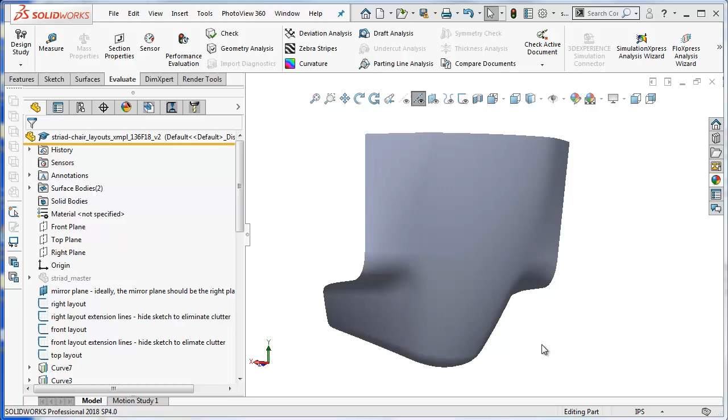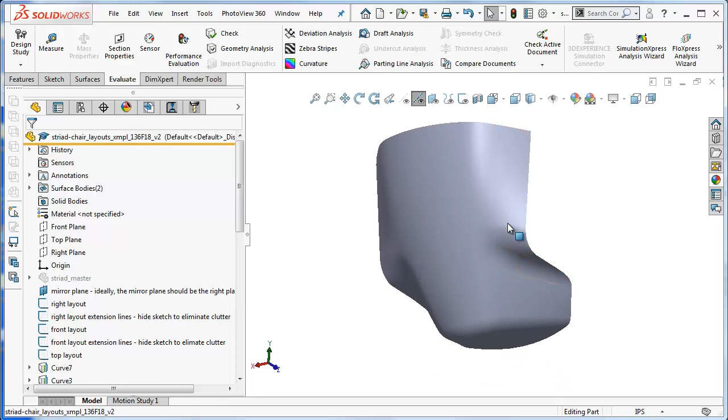Well, this is as far as I've gotten on the Striad chair, which isn't all that bad looking, but I know it's not right either. The key thing here is that there's a big rounded edge that transitions from the back to the sides, and you can see it's somewhat interrupted by the blend for the armrest. I think what's supposed to happen is the armrest is supposed to blend a little bit more forward of this surface, so that this nice rounded fillet will not be interrupted by the armrest blend.

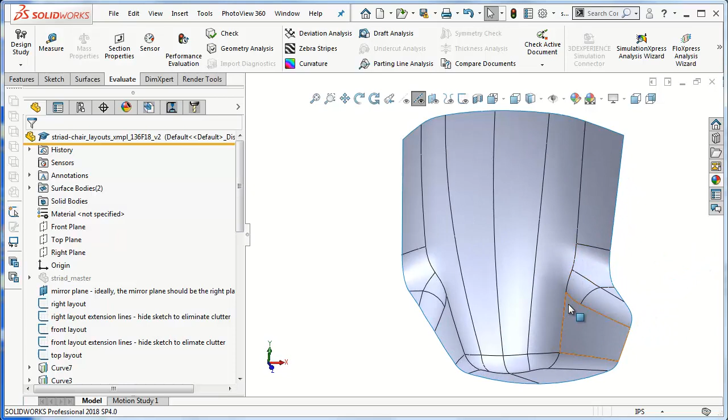So let me just turn on my edges here. You can see how this is sort of interrupting this nice curve here. So if we look at it from the side view, that's not too bad.

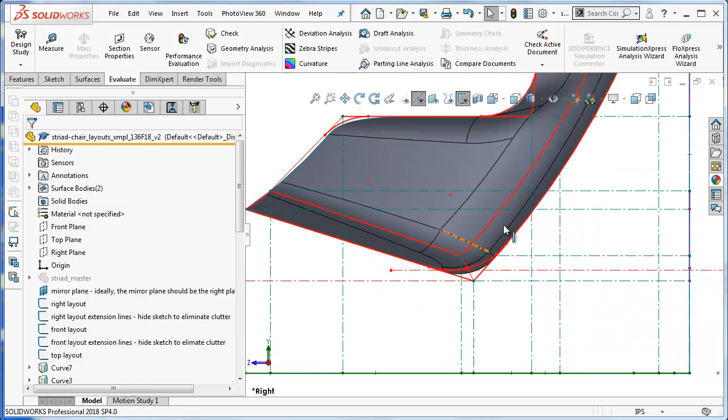But if I turn on my layout sketches, I wasn't able to get as big a fillet in here as it's really supposed to be. This is supposed to be more like 6 inches in here. The rest follows pretty well, and the top view follows pretty well.

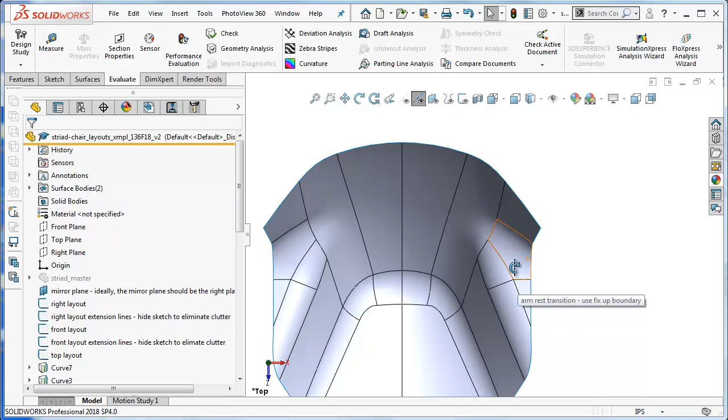So one of the interesting things about the chair is that up at the upper wings here, the seat back is folded forward quite a bit, but when it gets down into the armrest area, it's starting to twist backwards and is not folding forward so much. It's then after this whole blend in the armrest area occurs that this whole surface, of course, is bending forward even more now, because this is the support of the armrest.

So for what it's worth, I'll show you what I've done. This is still pretty much the same as before, but I put a little line on here because I wanted to have a cross-sectional sketch in this area.

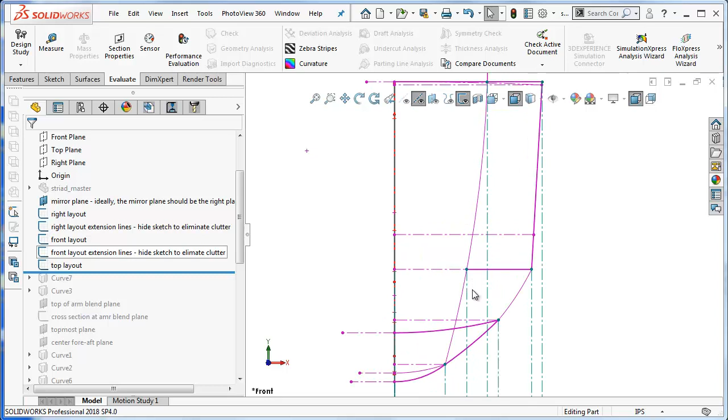My front view has a line that's the center line of that big radius I just showed you, and the armrest is running right into it. I think what's really supposed to happen is the armrest is supposed to stop about here, and there should be a second line coming down. That way the armrest won't blend right into that rounded back surface.

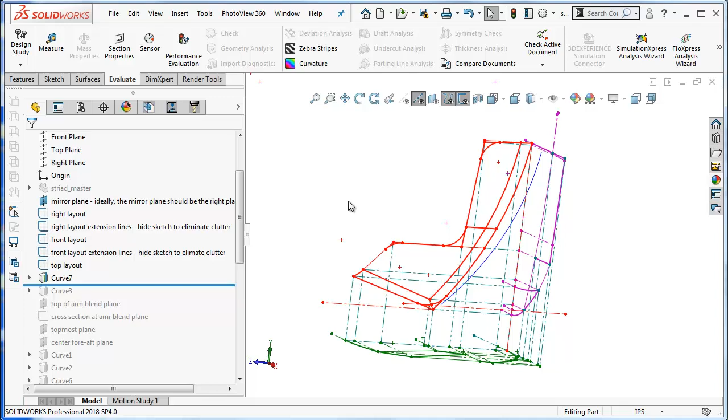So then I made a projected curve here that's a projection of this curve here and this curve here. And I made another projected curve that's a projection of this straight line here and this straight line here. I wanted to have that so I could draw an important cross section. And that's this cross section right here. Let's take a look at that.

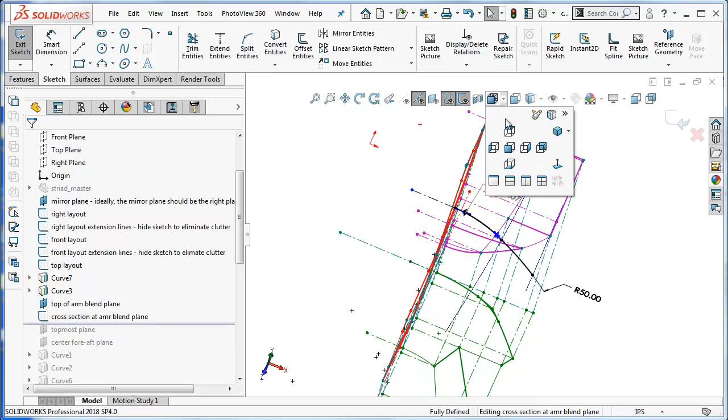This is the seat back area. Then it's blending into what I'll call the wings of the seat back. You can see that this is angling forward less than the top of the wings. In fact, the two are pretty much tangent to each other at this point.

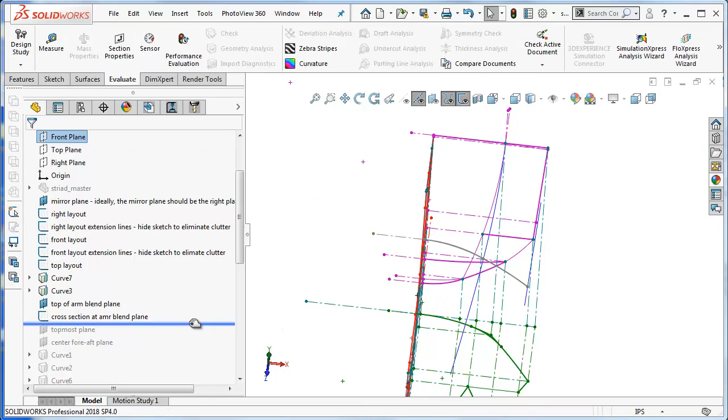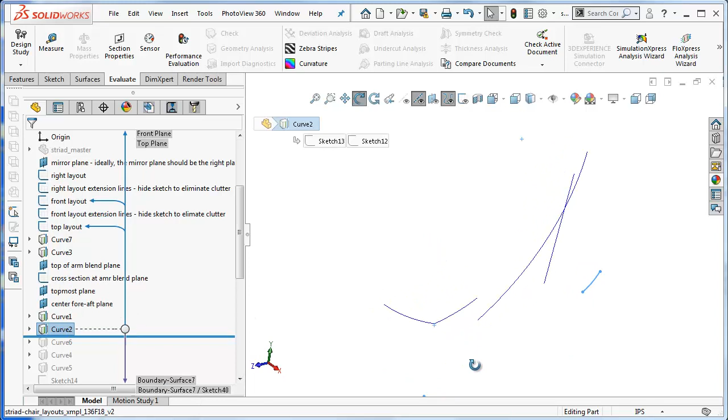So then I just made a bunch of other projected curves, like the one at this front edge here. Let's turn off all these sketches. I'm not sure what this one is for.

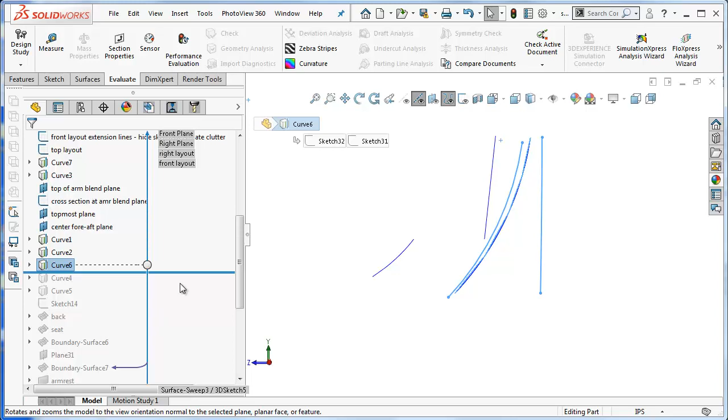Oh, this is the vertical leading edge of the seat area, or you might call that the arm support. And I think this was an extra copy of this projected sketch that I shouldn't have made. Oh well.

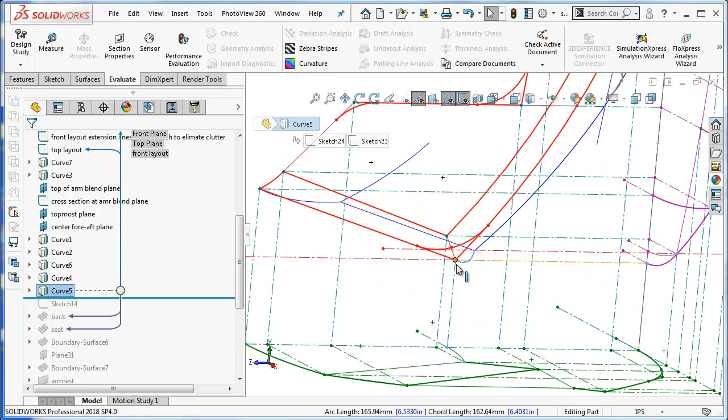This is the bottom edge that transitions from the seat to the arm support. And this curve here is the bottom edge right here, so it's got kind of a curve that's leaning forward. If we look at it from the top, it has to have this curve in it because this represents the shape of the back in this area.

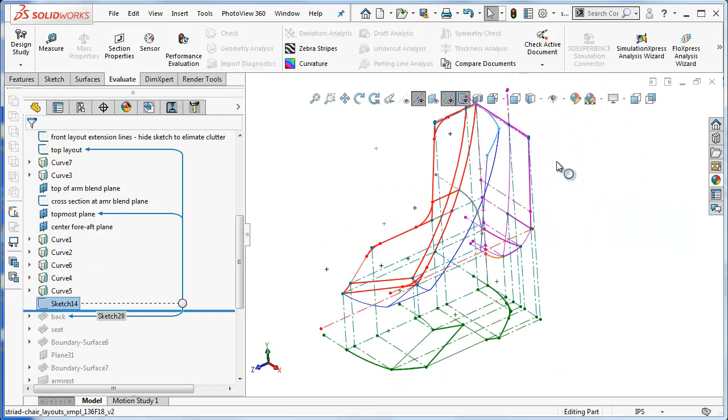And I'm not sure, this looks like a sketch that wasn't used, I'm not sure.

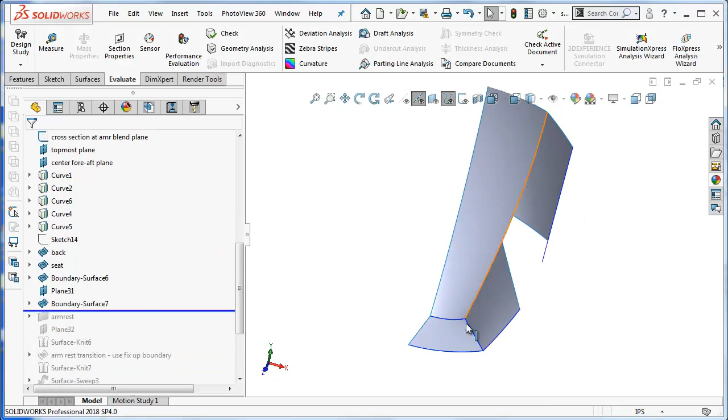So the first thing I did was just make a boundary sketch for the back, and a boundary of the seat, and a boundary of that upper wing, and the boundary of the arm support.

Then the actual armrest, which is just a little triangle that is ending here, because, let me maneuver this around, it's ending right here because this is going to be the area where that blended zone occurs.

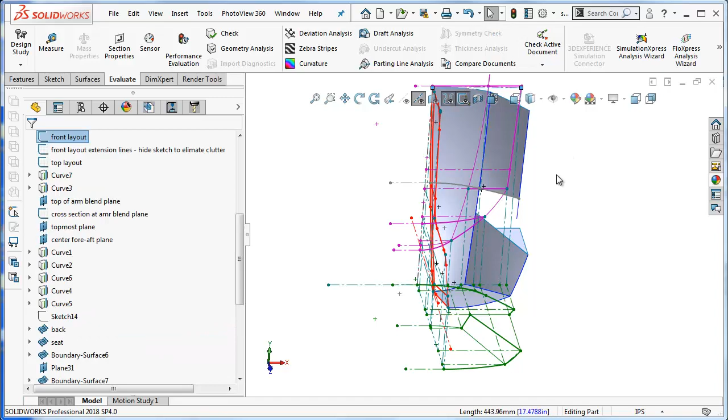It looks like I added a plane out here that's not doing anything. So I knitted these together. So you're starting to see the chair coming together.

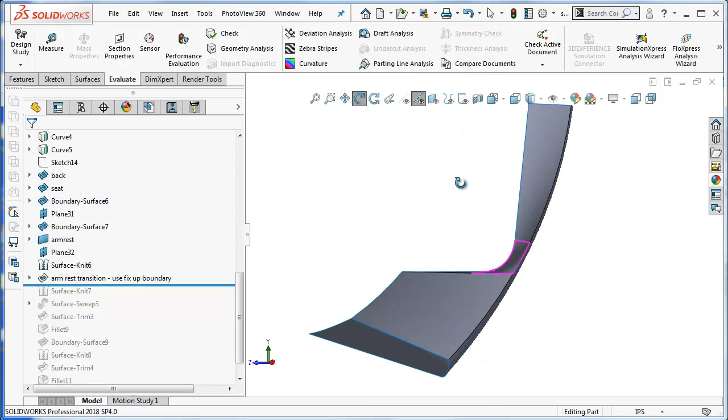And I used a fill surface to create this transition from this wing to the armrest. So that's a 5-sided surface, and that's how that blend is actually working. The trouble is, I think this really should have been blending back here somewhere, not interrupting this edge. So that's the big flaw in my design here.

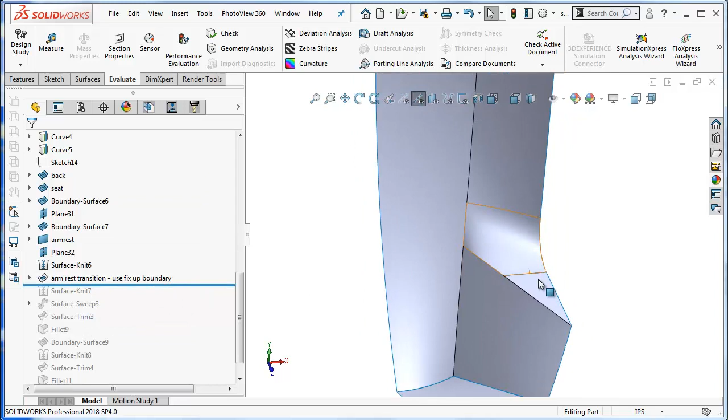I also had trouble making this fill surface. I had to use an option called Fix Up Boundary to get it to work. So I knitted those together, and I did a little surface sweep...

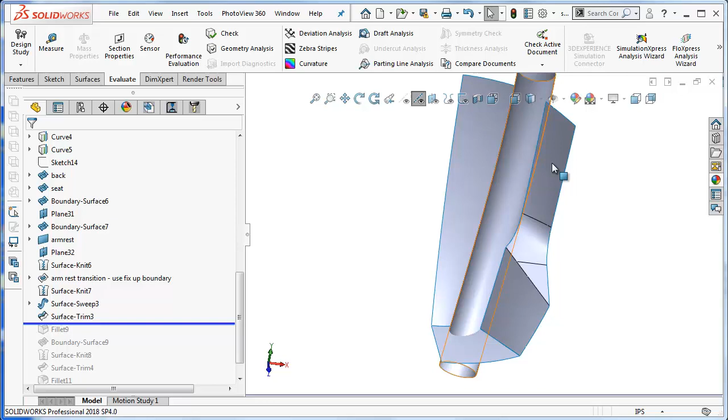...along that edge, because I'm going to use this to trim out a wide zone so I can just build in a blended surface there. So I trim that out, hide that. So here's our trimmed out zone.

I'm going to fill in the underside of the arm here. That's what gives the arm that sort of effect where it looks like it's blending down into this part of the seat.

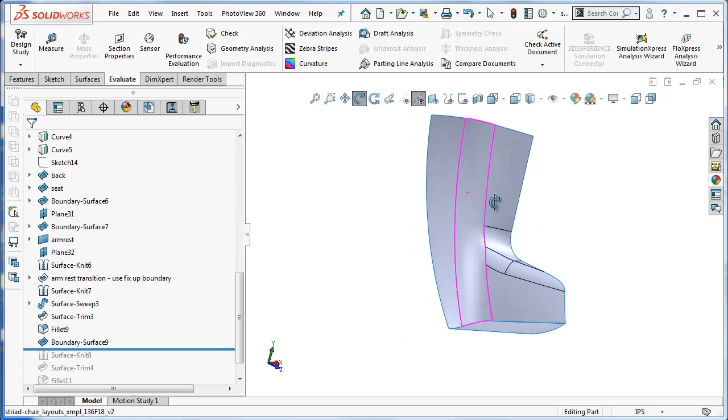And now I've made a boundary that's going from this edge to this edge, with equal curvature or tangency all along the edges. Again, you can see how this radius is sort of influencing this area, which I don't really think should be happening.

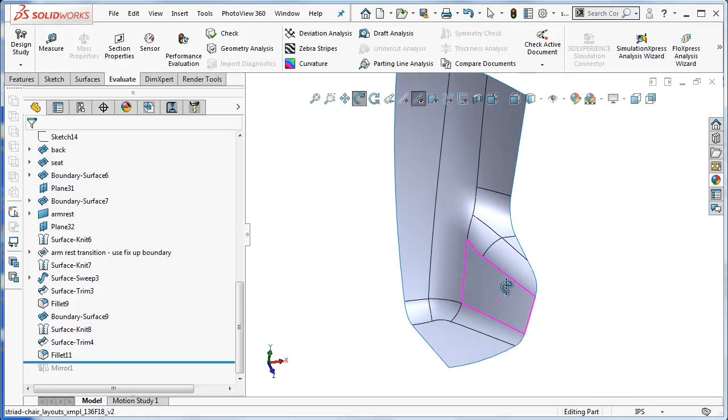Knitted that together. Then I used a mutual trim to trim the bottom and this feature together, and filleted all of that. And just to see what it looks like, I did a mirror image there.

So that's pretty close to the way a Striad looks, except for, as I keep repeating, this area here—this should look more like a nice clean radius coming through uninterrupted by the arm.